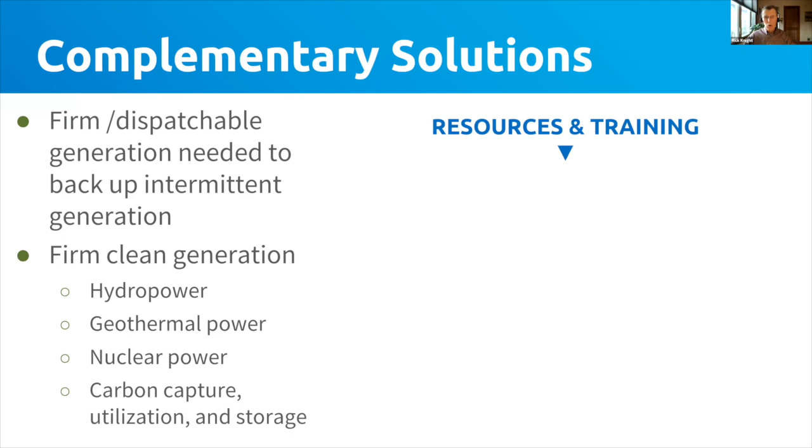The training pages on these can be found by navigating to resources and training, and then all training topics, then scroll down to climate science and tech, and then to the page titled How to Create a Clean and Stable Electric Grid, which looks like this. You can go through the whole training or just pick out the technology area you want to focus on.

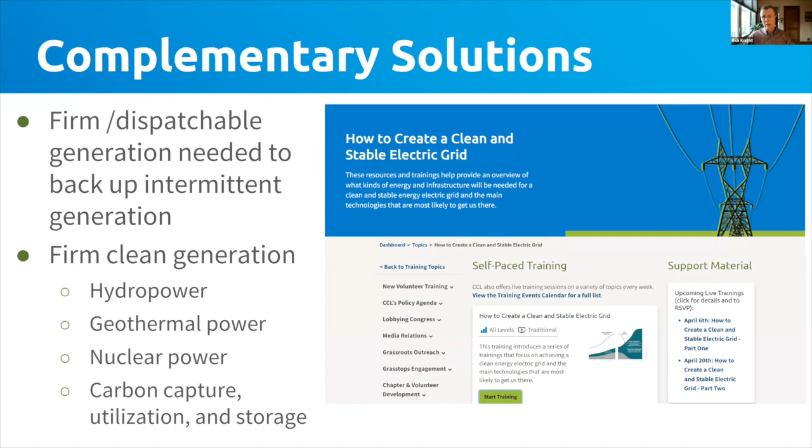So some definition of terms is in order here. Firm power means that the supplier of the electricity, the power plant or other generator, agrees to supply a certain level of kilowatts to the utility without interruption during some agreed period, during a period covered by an agreement, as the legal terminology says. That way, the utility and customers can rely on electricity being available, barring certain emergencies.

Now, dispatchable power, on the other hand, means power that can be ramped up or down in response to demand. It's also a matter of agreement between the supplier and the utility, but in a little bit different terms. The supplier agrees to turn its output up or down to match the utility's needs. So I'll try to point out how this works for each of our four technologies as we go along.

So first up is hydropower, which is short for hydroelectric power, sometimes referred to just as hydro. This is a way to tap the energy of flowing water to generate electricity by running it through a turbine. Interestingly, it uses the potential energy of difference in elevation, and that energy ultimately comes from the sun, evaporating water into the atmosphere, which then comes down as rain or snow to fill our streams and rivers.

That running water has been used for millennia to grind grain and other tasks, but only since 1881 for electric power. Barring unusual environmental conditions like drought, hydropower can be regarded as firm power. It's also dispatchable because it's easy to adjust up or down simply by bypassing the turbine. Today hydropower generates about 6% of US electricity and 16% worldwide.

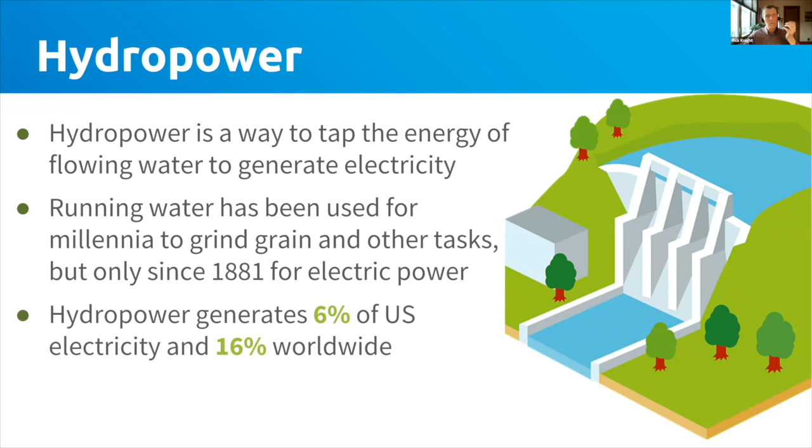Not so much after that, when the continuing electricity boom was fueled mostly by coal, nuclear, and a bit later by natural gas. But even though new hydro has slowed down in the US, now that we need to deeply cut emissions, it can provide firm, dispatchable backup power for those intermittent renewables.

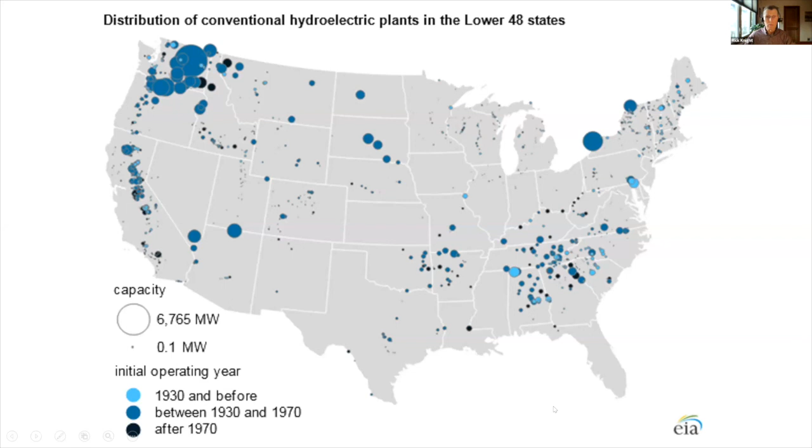Now this map, the next up, is geothermal power. It's a way to tap into heat energy deep under the earth in a way that generates electricity. Aside from wind, solar, and hydropower, most large-scale electric power for the last century has been generated by using heat to turn water into steam that then spins a turbine attached to a generator. That heat has mostly come from burning fuels like coal and gas, but it can also come from the Earth's primordial heat buried right under our feet.

The US has been exploring geothermal power generation since 1922, but that was a short-lived effort in California. The first sustained commercial geothermal power plant at the same site launched in 1960 and has expanded ever since. Like hydro, geothermal is both firm and in theory dispatchable because the turbine can be quickly engaged or bypassed in a matter of minutes.

Today, geothermal energy contributes only 0.4% of electricity in the US and about the same percentage worldwide. But analysts maintain that the untapped potential could expand to 10 times that percentage of demand by 2050, which will, of course, go up.

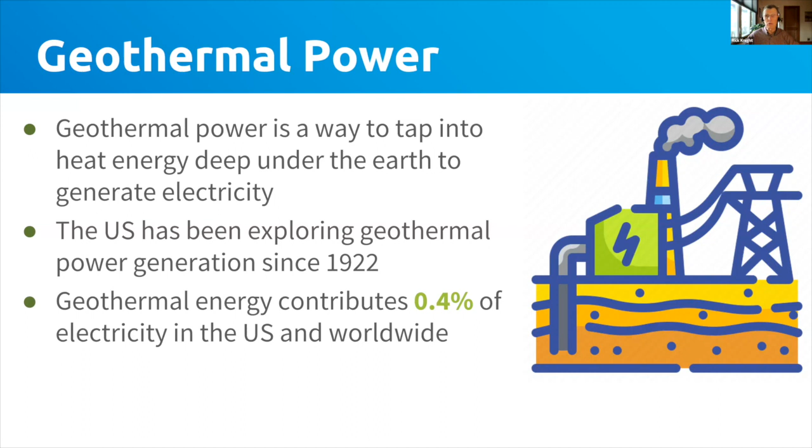That's not where the greatest population density is, but it's where most of the population growth is happening. And it's also where climate change is increasing demand due to rising heat and drought.

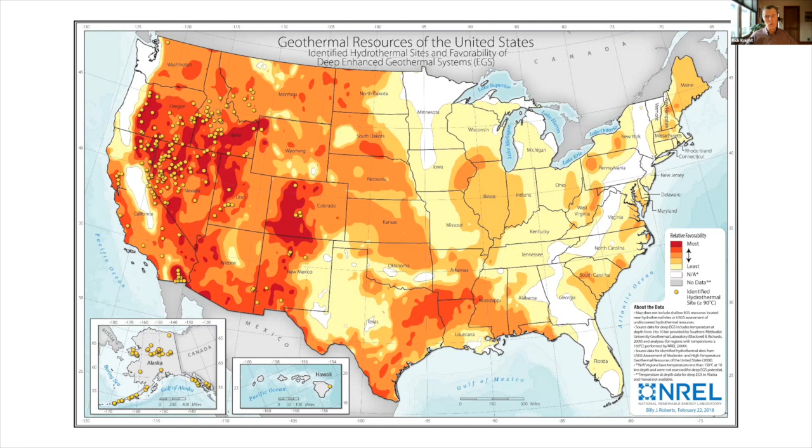Nuclear power is a way to tap into a unique type of energy packed into the nucleus of certain atoms, heavy radioactive elements like uranium, in order to generate electricity from that heat. Nuclear energy is, of course, one of the most controversial of all energy technologies for a bunch of reasons, and we'll get into those. Although the first nuclear reactor to generate electricity was in 1951, the first commercial nuclear plants didn't start up until 1960.

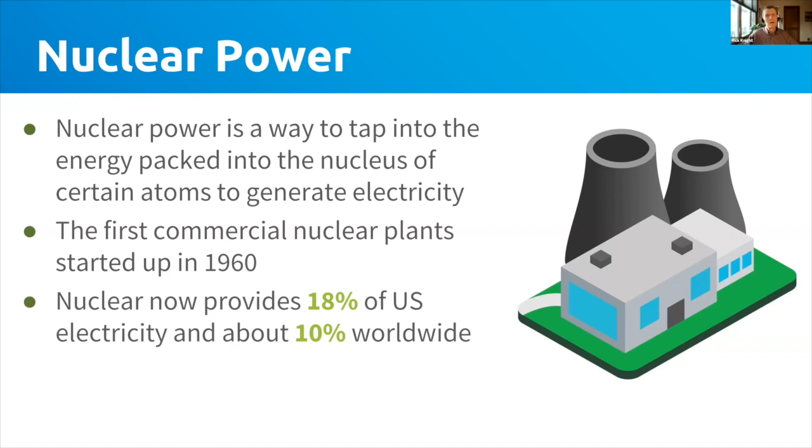Today, nuclear provides 18% of US electricity and about 10% worldwide. Nuclear power is firm, but is it dispatchable? Kind of, but not really, because it is quite slow to adjust up and down. Maybe some new technology will change that, but as of today, it can't really be considered dispatchable. Although proponents say it is, but it's a little bit slow.

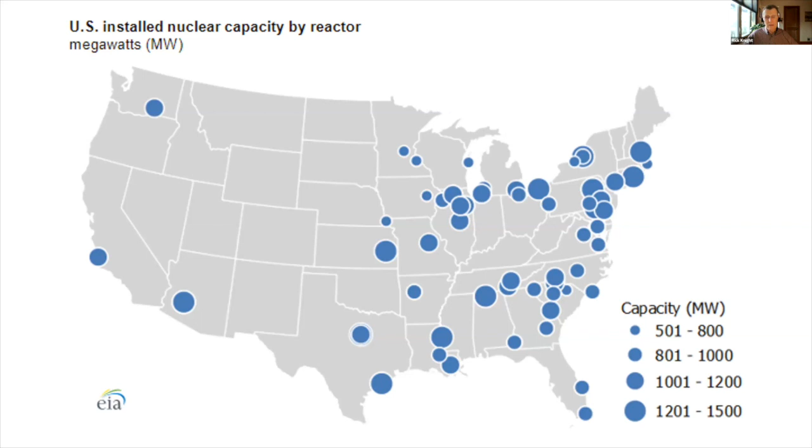But first, a brief overview of the last technology that we'll cover today. That's carbon capture, utilization, and storage, or CCUS for short. This is a system to grab carbon dioxide out of power plant exhaust, that's the combustion gases from burning a power plant fuel, and then take it away, stash it somewhere where it won't affect the climate.

Carbon capture actually is mature, well understood technology, but it adds costs to the power plant operation. After all, it costs nothing to just let it go up into the air, but it costs something to capture it. Generally quite a bit, depending on how concentrated the CO2 is to start with. The more concentrated, the more efficient it is to capture.

CCUS can, in theory, help reduce carbon emissions during the transition to carbon-free energy that we're all working toward in the near future. As for the question of dispatchability, that really depends on what kind of power plant it's attached to. Natural gas can be ramped up or down in a matter of minutes. Coal plants are slower. A carbon capture plant may stretch that out too, as it's necessary to keep the capture efficiency balanced within some limits.

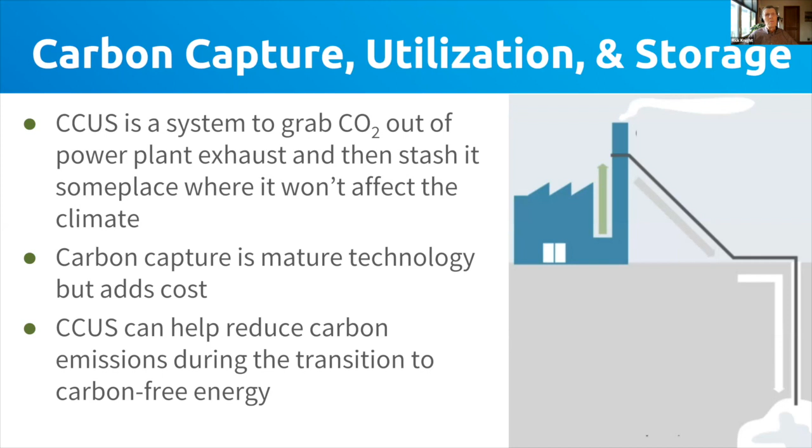So a little more explanation, because this technology is a little complicated. At the power plant where fuel is burned, the gases leaving the furnace are treated to remove pollutants like particulate matter and other nasty stuff.

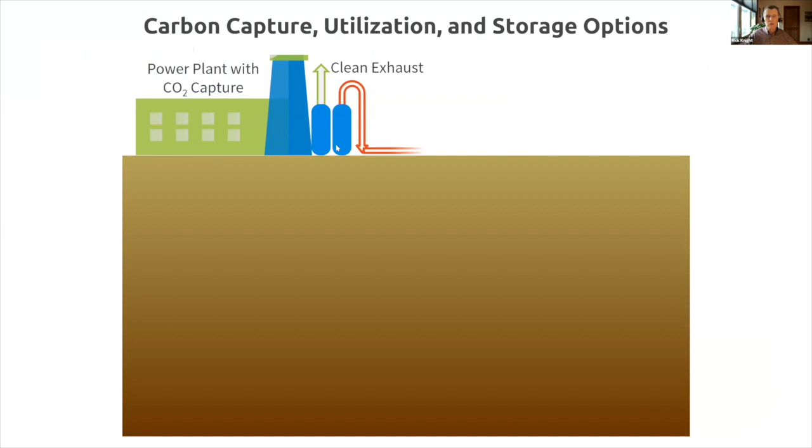Then the filtered gas goes into a chamber here where a special liquid is sprayed from above, and that liquid absorbs the CO2, and then the scrubbed exhaust goes into the atmosphere up here, clean exhaust.

The solvent with the CO2 then goes to another chamber, where it's heated to drive off the CO2, which is then piped away. The solvent is recycled back to the first chamber, so you get a circulation like that, taking out the CO2 and sending it away.

Now, that CO2 can be piped to some manufacturer who uses it to make products like building materials, special types of concrete or polymers, using renewable energy to provide the energy for that transformation. So that's the utilization option.

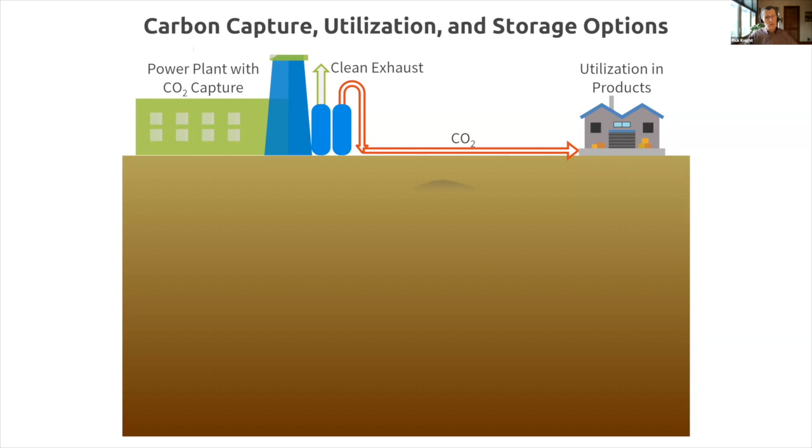Or it can just be pumped underground, where it stays for a long, long time and ultimately gets absorbed into these underground structures. That's the storage option.

Utilization seems politically attractive because you can make something useful from the carbon, but it turns out that when you crunch the numbers, all of the products that could possibly be made from CO2 only add up to a few percent of our emissions. So most of that carbon dioxide will still have to be stored deep underground in what is referred to as geological storage.

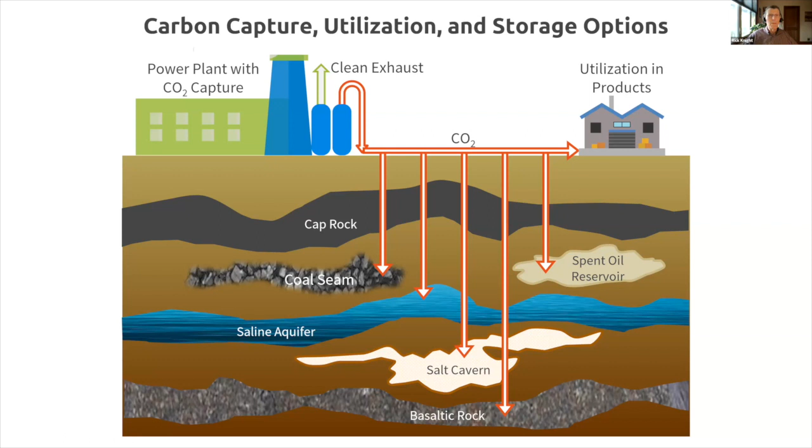So that's the background on those 4 technologies, all of which could help out with the need for firm power to back up wind and solar. But now let's look at the strengths and weaknesses of each technology.

First, with hydropower, the advantages are that it's steady and consistent 24/7. It's a low-tech solution. It doesn't require exotic materials. It's easily dispatchable, and dams can supply auxiliary community benefits like flood control, support for irrigation, and supplying clean drinking water.

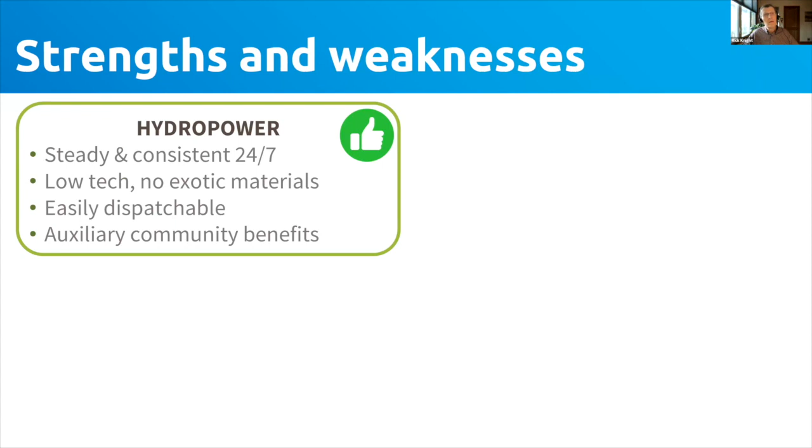The disadvantages are that suitable sites are limited. It can be affected by drought, which can lower water levels. This has been a big problem in the Southwest. The construction of dams and reservoirs has ecosystem impacts, and large dams could result in community displacement.

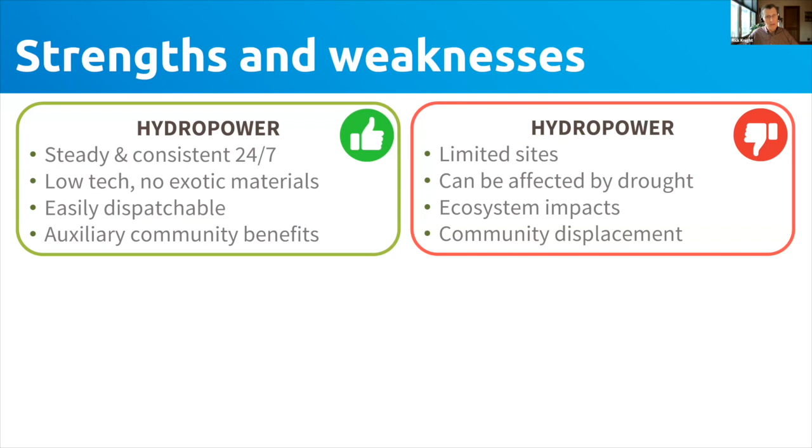Now, for geothermal, the advantages include a large untapped potential. It can be available 24/7 without being affected by weather like hydro. It can employ skilled oil and gas workers who have extensive experience at the needed drilling technologies, and it's easily dispatchable. There are disadvantages of geothermal power too.

Even though the total amount of heat stored in the earth is vast, there are still limited sites where our technology can economically get at that energy. There is the need to consider possible seismicity, inducing earthquakes. It's also tricky to assess the potential at any given site until you actually drill down, which is costly. And there are particularly lengthy permitting rules for geothermal projects.

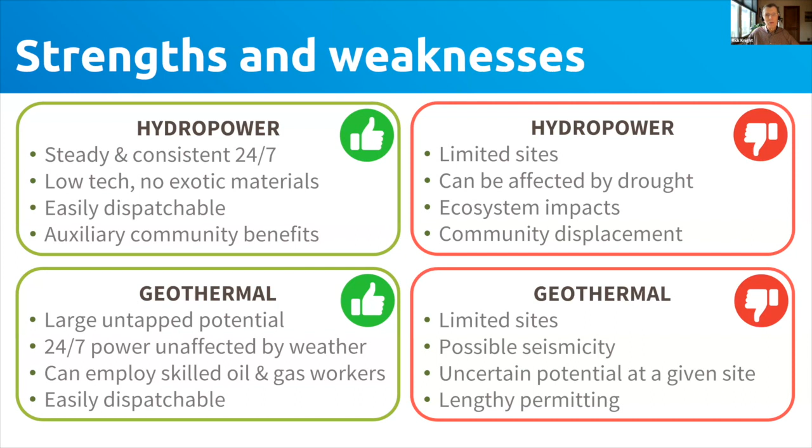Now, nuclear power has these advantages. It's steady and reliable 24/7 once it's up and running. It does have a very low life cycle carbon footprint. It also has a small land footprint compared to the amount of power generated.

On the other hand, there is the issue of public mistrust, again, due to the fact that while catastrophes are very rare, they are at the least very disruptive. There is an issue of radioactive waste storage. Nuclear plants have high capital costs, and mining of uranium creates environmental concerns, especially here in the US in tribal areas where much of the uranium ore is located.

Carbon capture and utilization storage has certain advantages. It can be applied to existing fossil fuel power plants to lower the greenhouse gas emissions that are already coming out. That also means there is no need to build new transmission lines because the plants are already there. It can be deployed quickly at most sites. And if combined with biomass fuels, negative emissions are possible. That's called biomass energy with carbon capture and storage, or BECCS.

But the disadvantages of CCUS include concern about fossil fuel lock-in, meaning that it could prompt utilities to just keep building more fossil fuel plants.

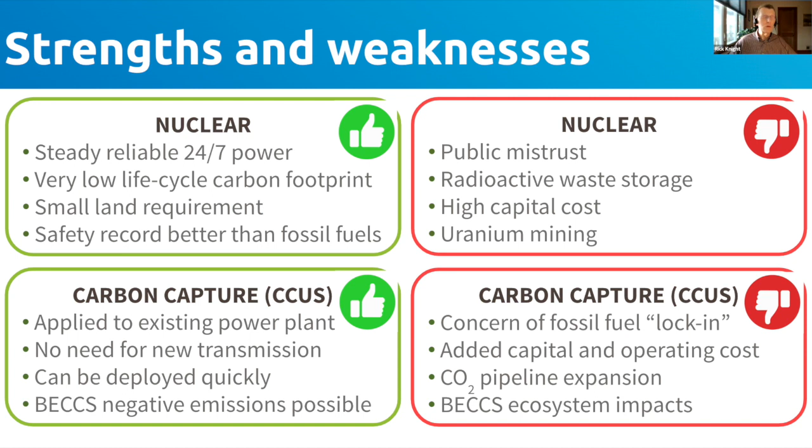Well, let's take a look at what one prominent think tank has come up with in their modeling. Princeton University has done extensive modeling on this question, and in October 2021 they issued a report called Net Zero America. They modeled one reference scenario, meaning business as usual, and five net zero scenarios. We'll go into those five scenarios.

Here's the breakdown for power generation in terawatt hours under that reference scenario, going from 2020 across to 2050. The color codes are at the top left, and though it's not easy to distinguish all the colors, you can see renewables are at the top, fossil fuels, and finally biomass, which is a very narrow sliver at the bottom. Total electricity demand grows by only 26% in that business as usual scenario.

So to relate it to what we've been discussing, here's what it looks like if you combine all the firm generation into one blob. That's all the firm sources, which are about 85% today, and predicted to be about 62% by 2050 as wind and solar ramp up. If you pick out the firm and clean sources, they look like this—actually declining a bit as wind and solar grow, but coal and gas stay about the same.

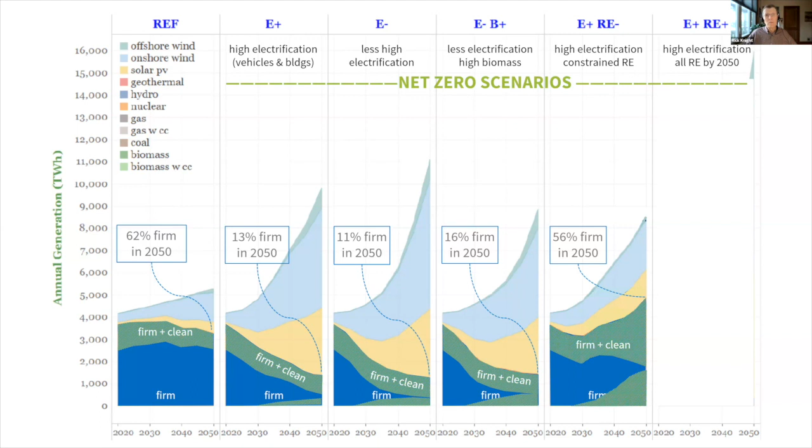Finally, the fifth scenario, labeled E+, RE+, is kind of the mirror image of E+, RE-, where wind and solar are unconstrained, but there are policy or market forces that completely rule out a role for nuclear and carbon capture by 2050. Without those firm sources, we need way more wind and solar to maintain grid reliability. Firm power ends up only at 3% in 2050, and all of that comes from hydro and a tiny bit of geothermal energy. Needless to say, all of that firm generation is clean.

So Princeton has tried to cover all the bases here, and it tells us that firm generation is, in most scenarios, required for around 1,000 to 5,000 terawatt hours, which is between 11 and 56% of total electricity. Only in the extreme fifth scenario does it drop to just a few percent.

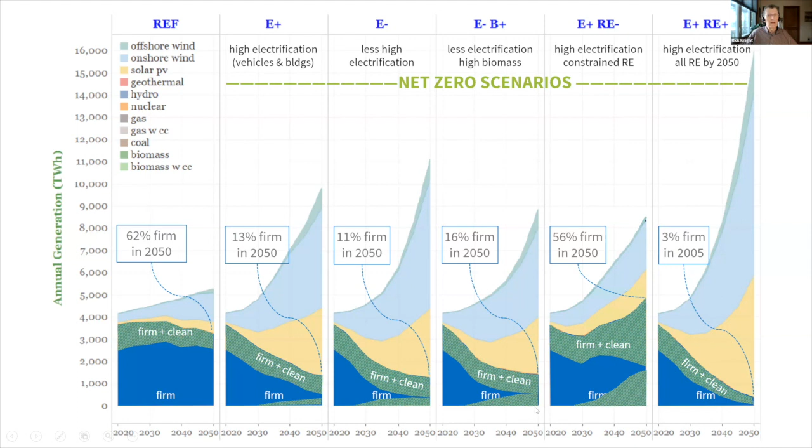Now, what does all this tell us? It tells us that to achieve net zero by 2050, no matter how fast we electrify and how much wind and solar are deployed, firm power will be needed at very least well into the 2030s.

Firm power from conventional coal and gas must be steadily replaced by clean firm power. And unless prohibited by some policy decision, carbon capture is likely to play some role—power generation from plants equipped with it could range from as low as 3% to as much as 20% of the total in 2050.

Similarly, unless prohibited, nuclear power will supply some amount of firm power, ranging from as low as 4% to as much as 30% by 2050. And hydro and geothermal power combined will consistently supply somewhere between 300 to 400 terawatt hours, or depending on total demand, between 8 and 100% of all firm power by 2050.

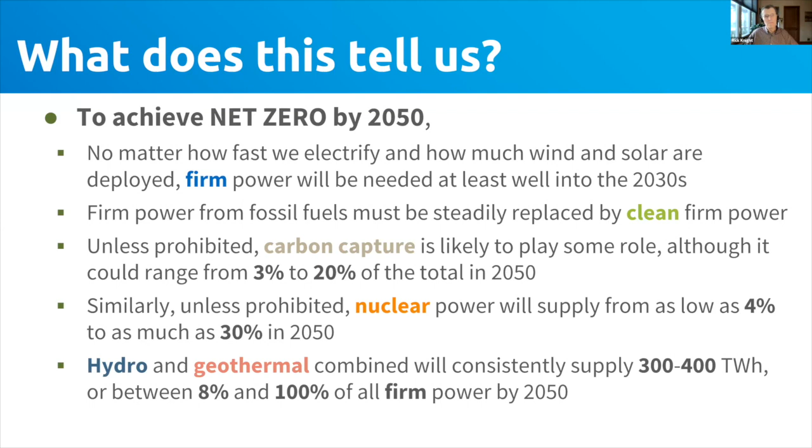So now I'll move on to some frequently asked questions, and I've grouped them according to the technology. Let's start with hydropower.

First, aren't most locations already developed? That depends on where the needs are. The Energy Department says that additional potential, excluding federally protected areas, could double the contribution of hydro, even given the increased demand for electricity by 2050. One of the ways to do this without building new dams is to retrofit existing dams that don't currently have power generation.

Another question: what impact do reservoirs have on natural habitats? They certainly can have an impact, especially if they're poorly managed. They can reduce water flow, raise water temperature, degrade water quality, and cause sediment buildup, negatively affecting fish, birds, and other wildlife. There are remedies to this, provided there is the political will to use them.

Another question: what about pumped hydro? You may have heard about this. It refers to an energy storage method where water is pumped up into an artificial reservoir when excess renewable energy is available, and then run back down through a generator when demand is high. So it's not connected to a natural waterway, and it's not hydropower strictly speaking. It's covered in our training pages under energy storage, and I'm sure you heard about it if you tuned in to part 1.

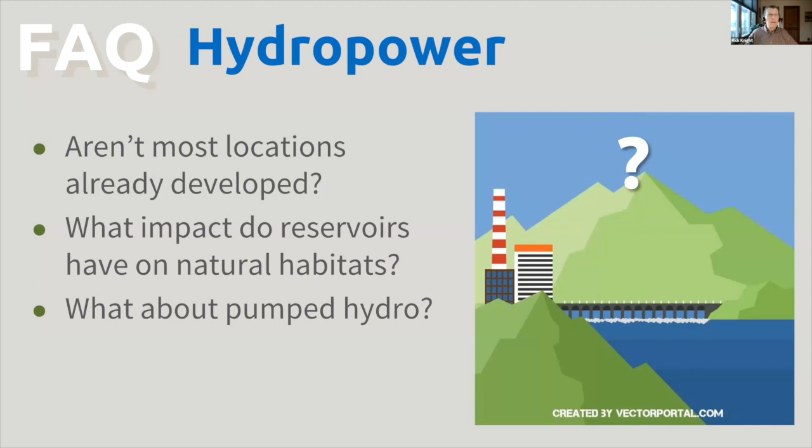Now on to geothermal. First question: is geothermal power really renewable? It's not wind or solar, and it doesn't come from the sun, but there is a tremendous amount of energy stored in the earth, so there's no danger of depleting it or turning the earth cold, although it's more accessible at some sites than others. So competent analysis and site management is needed to make the economics work.

Can geothermal power cause earthquakes? I mentioned that earlier, and the answer is maybe, depending on the technology used. There are 4 types of geothermal power plant, and one of them uses hydraulic fracturing to get at the most heat most efficiently, but that has induced some minor seismic events. There are ways to minimize this risk through improved monitoring and modeling, along with adoption of power cycles that lessen the disturbance of geology. But again, it's a matter of setting standards and enforcing them.

Another question that really involves nomenclature: what about geothermal building heating? The term geothermal has been used when talking about heat pumps for home heating, but it's a completely different use of the word. A more accurate term is ground source heat pumps, where tubing is buried a few feet underground to make a heat pump more efficient because the ground stays warmer than the air on very cold winter days. But it has nothing to do with the kind of geothermal power generation we're talking about here, even though the same word is often used.

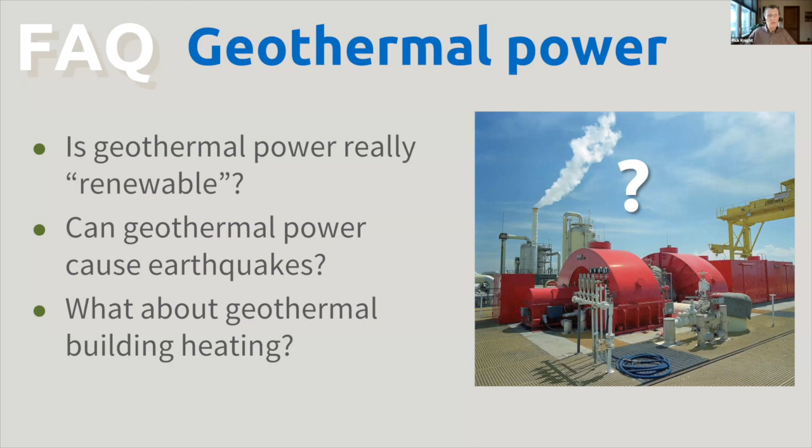Now for nuclear power. The first question: is nuclear power safe? There's not really a yes or no answer because safe is relative. While there have been a few high-profile incidents—everyone knows about Chernobyl back in 1986 and Fukushima in 2011—stringent safety requirements for nuclear plants and the lack of air pollutants make them hundreds of times better than fossil fuels for public health. Over the long term, nuclear power is actually comparable to wind and solar in terms of lives lost per gigawatt hour of power generated, but it's still essential to keep working to minimize the hazards that still exist.

Which leads us to the next question: what about small modular reactors and Generation 4 reactors? Nuclear reactor designs that are inherently safer than the old technology have been proposed for years, and research has started and stopped, but now those efforts seem to be finally getting serious. Some companies are pushing ahead with small modular reactors, or SMRs—here's a graphic showing just how much smaller. They claim these could be standardized and be less costly and safer than traditional large plants. It remains to be seen whether they can deliver on those claims.

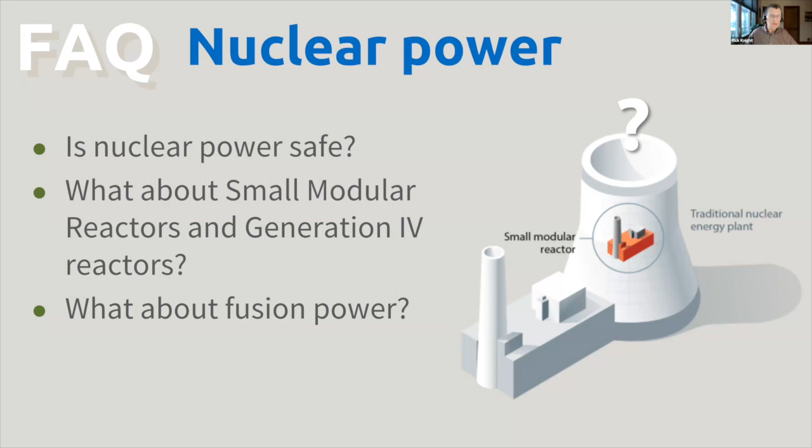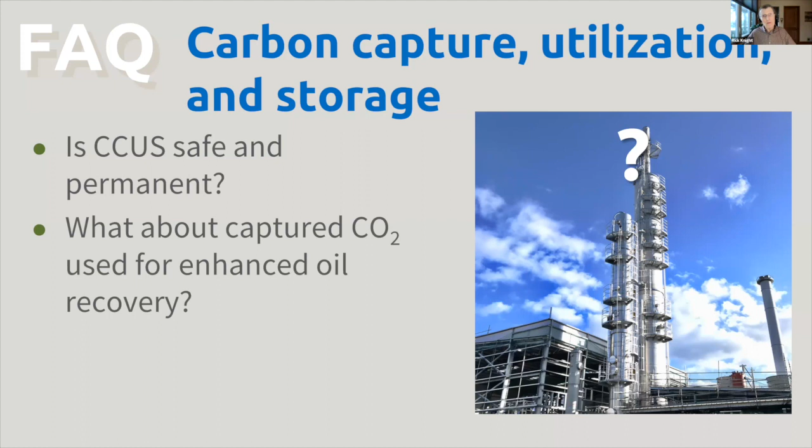The next question: what about captured CO2 that's used for enhanced oil recovery, which has been controversial in recent years? This EOR is a way of getting more oil out of old wells by pushing it out with a gas like CO2. And this rankles environmentalists because it seems a bit nuts to try and reduce fossil fuel emissions by producing more fossil fuel. But if you consider that oil consumption is controlled by market demand, not by the amount of oil produced, maybe it doesn't really result in more emissions because it just displaces oil that would be produced somewhere else. And besides, getting more oil from existing wells could arguably mean fewer new wells are drilled, and the CO2 that goes into those wells is still kept out of the atmosphere. So it's still better than not capturing it at all.

So as you can see, all of these questions are valid, and the answers may not be very simple yes or no questions. But these are what we have for now. And a lot of research is going on. A lot of investment is taking place in carbon capture right now.

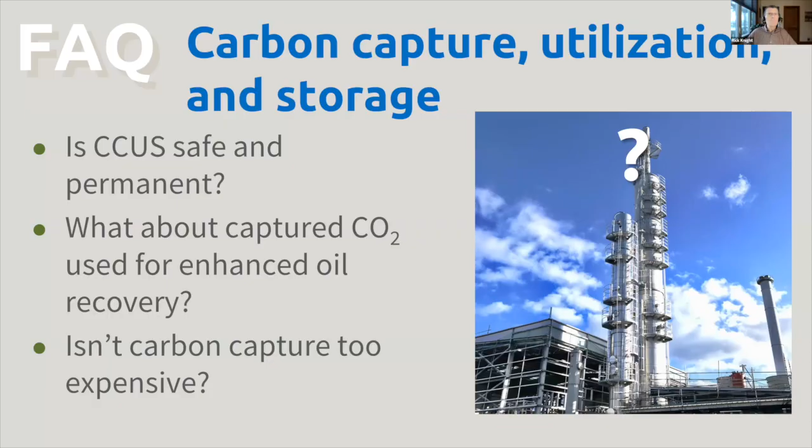So let's reflect back and summarize. A stable, clean electric grid will require a diversity of complementary solutions. We need both variable and firm sources of power generation to make this transition with minimal disruption. Princeton's modeling has shown that, and common sense tells you that. Thanks to technological advances in every field, it will probably be cheaper today in the long run when you consider the avoided climate and health costs that we would otherwise pay. And reduced climate and air pollution will yield healthier, happier lives. So that's what we want, right?